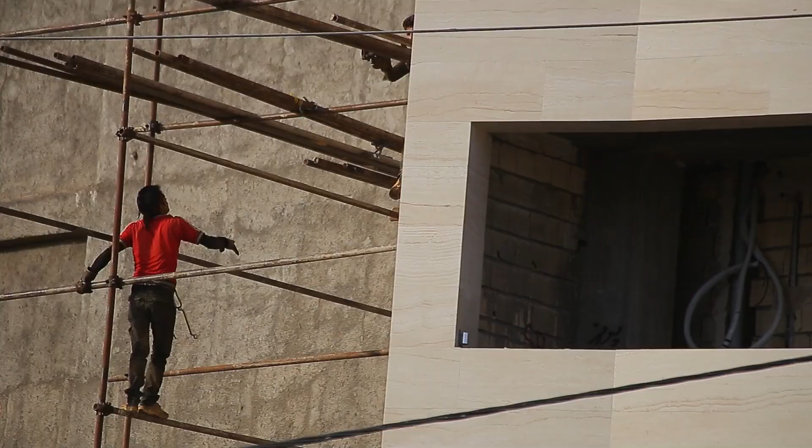Height. In this video, we are going to learn briefly about safety tips, safety in scaffolding, safety tips for ladder working, etc. Here are the contents we will cover in this lecture. The first one is safety tips for working at height, safety for ladder work, safety tips for scaffolding, working at height safety precautions, safety tips for lifelines, the safety dos and don'ts of working at height, and the last one is a conclusion.

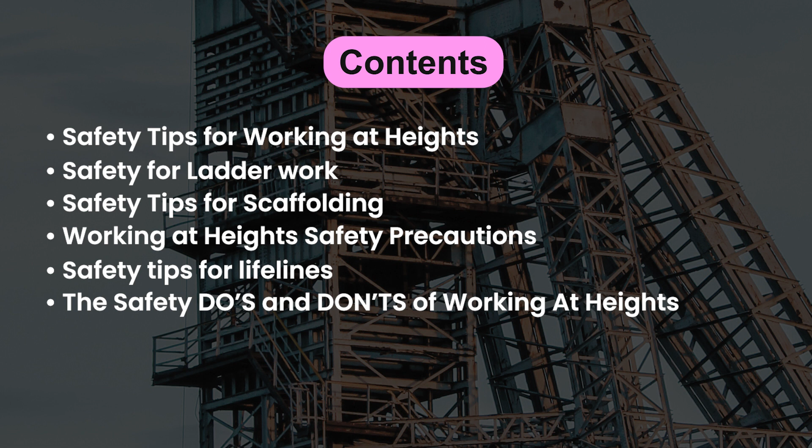Let us discuss the important points. The first important point is the safety tips for working at height. Working at height can be dangerous, but with proper safety precautions, you can minimize the risk. Here are some important safety tips for working at height. The first one is use the right equipment. Always use appropriate personal protective equipment such as hard hats, safety harness, non-slip footwear and gloves.

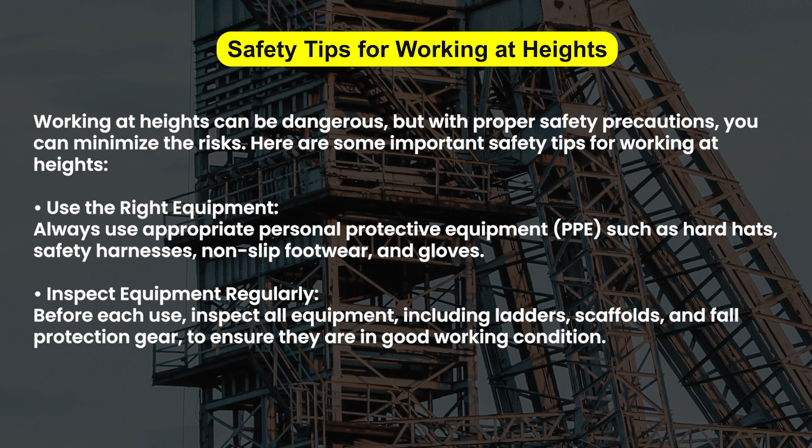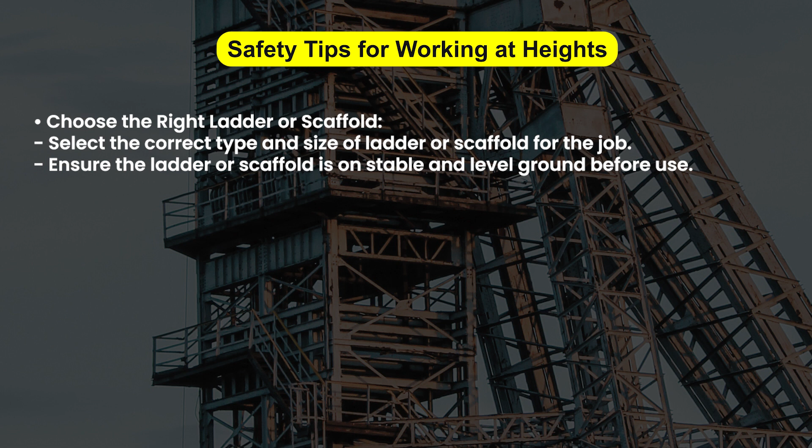The second point is inspect equipment regularly. Before each use, inspect all equipment including ladders, scaffolds and fall protection gear to ensure they are in good working condition. The next point is choose the right ladder or scaffolding. Select the correct type and size of ladder or scaffold for the job. Ensure the ladder or scaffold is on stable and level ground before use.

Another point is guardrails and toe boards. Install guardrails and toe boards on elevated platforms to prevent falls. The next important point is fall protection. Use fall protection systems like guardrails, safety nets or personal fall arrest systems, harness and lifeline when working at height above a certain threshold. The specific height requirement can vary by jurisdiction.

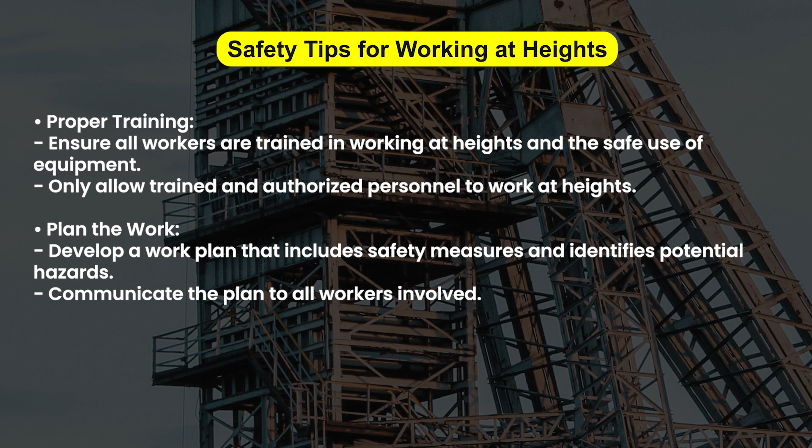Another point is proper training. Ensure all workers are trained in working at height and the safe use of equipment. Only allow trained and authorized personnel to work at height. The next point is plan the work. Develop a work plan that includes safety measures and identifies potential hazards. Communicate the plan to the workers involved.

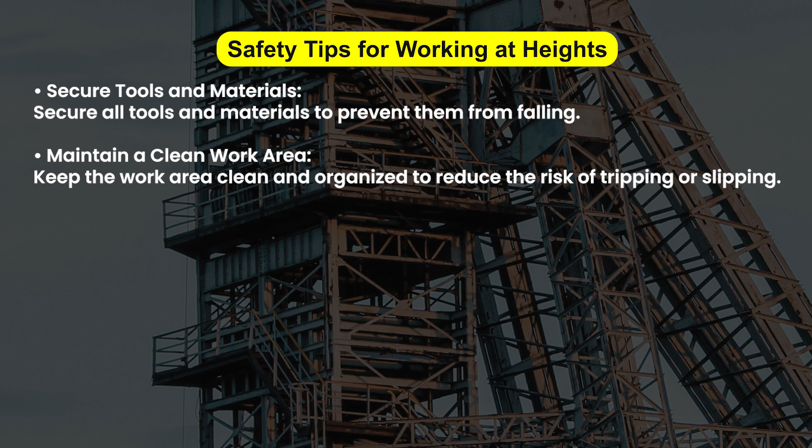Weather conditions. Be aware of weather conditions, as wind, rain or snow can increase the risk of accidents. Avoid working at height during adverse weather conditions. The next point is secure tools and materials. Secure all tools and materials to prevent them from falling. The next point is maintain a clean work area. Keep the work area clean and organized to reduce the risk of tripping or slipping.

The next point is keep a safe distance. Maintain a safe distance from the edge when working near unprotected edges or openings. The next point is no horseplay or distraction. Avoid horseplay, distraction or using electronic devices while working at height. The next point is a rescue plan. Have a rescue plan in place in case of a fall or equipment failure. All workers should know the plan and be trained in rescue procedures.

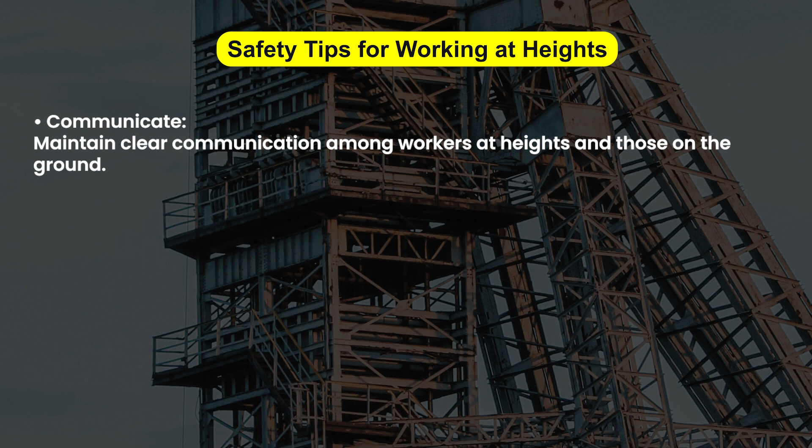The next point is communicate. Maintain clear communication among those working at height and those on the ground. The next point is emergency procedures. Know the locations of first aid kits and emergency exits. Have a plan in place for summoning help in case of emergency. The next important point is regular training and updates. Keep workers updated on the latest safety procedures and conduct regular safety training sessions.

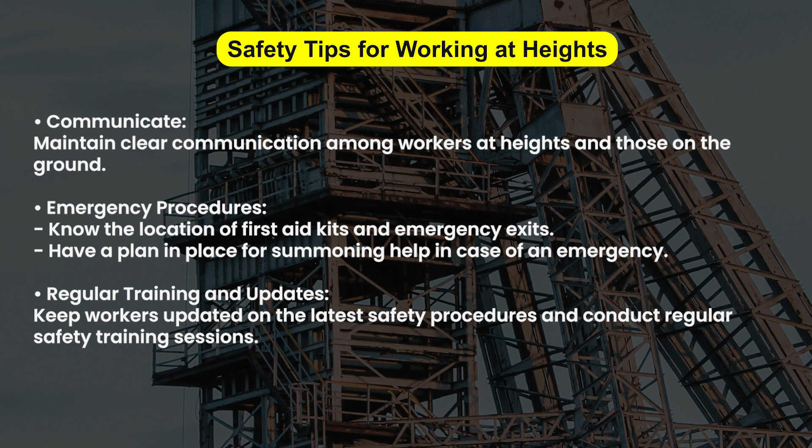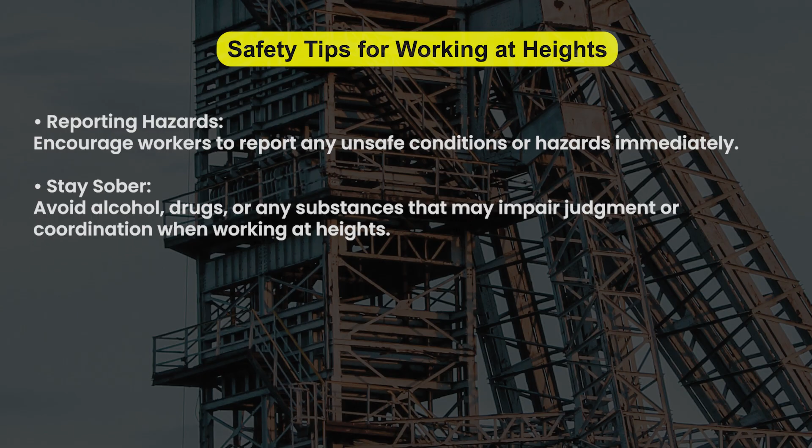The next important point is reporting hazards. Encourage workers to report any unsafe condition or hazard at their sites. The next important point is stay sober. Avoid alcohol, drugs and any substance that may impair judgment or coordination when working at height. Remember that safety should always be a top priority when working at height. By following these safety tips and being vigilant, you can reduce the risk of accidents and injuries. Always adhere to local safety regulations and guidelines, as they may vary depending on the location and industry.

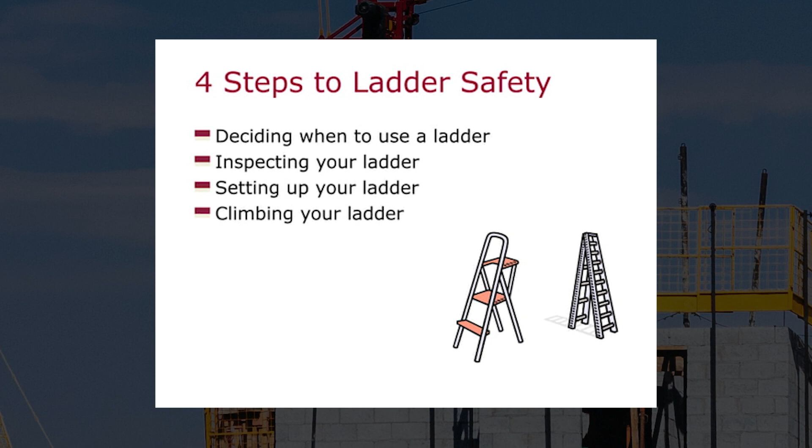Let us discuss the 4 steps to ladder safety: deciding when to use a ladder, inspecting your ladder, setting up your ladder, and the last is climbing your ladder. Let us discuss briefly the first point, deciding when to use a ladder. Use a ladder when you cannot safely reach an object or product in overhead locations. Whenever possible, try to arrange heavier items on lower shelves and lighter weight items on the upper shelves. Organize more popular products on lower shelves for quick accessibility. Store slower moving items on higher levels where a ladder would be required. Organize your storage room to limit and reduce ladder use.

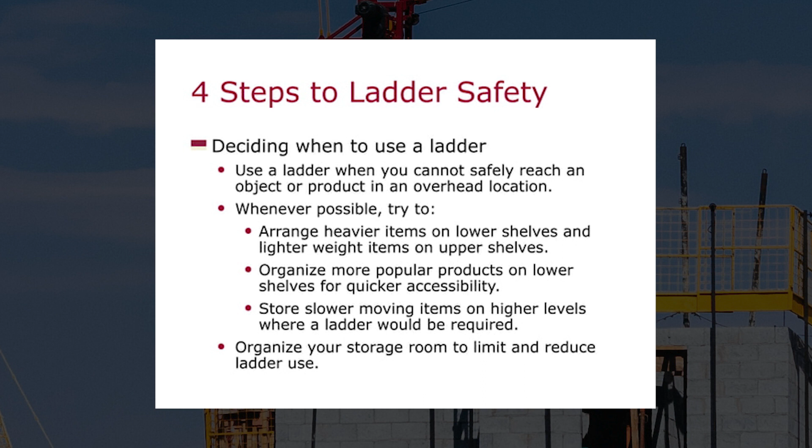Another important point is inspecting your ladder. Select the right size ladder for the job. Ensure your ladder is appropriate for the job and will support you and your load. Before use, check the condition of your ladder. Do not use a ladder with loose, broken or missing rungs, screws or bolts. If your ladder is unsafe, report it to your manager. Make sure the feet are clean, rest securely on the ground and resist slipping. Store your ladder safely to avoid tipping. Don't use your ladder for other than its intended purpose.

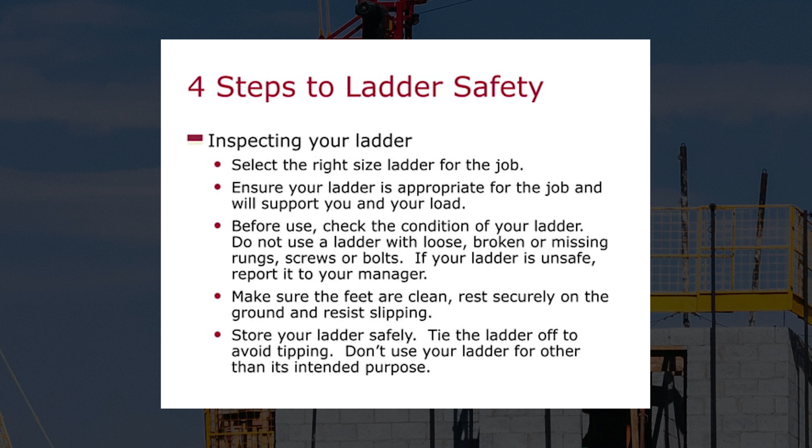Let us discuss another important point: setting up your ladder. When carrying a ladder, hold it near the center and keep it close to your body, or use 2 people to move the ladder, 1 person at each end.

Rest the base of the ladder on a dry, solid, even surface free from debris. If possible, have someone hold the ladder to provide added security. Secure your surroundings. If your ladder is set up near a doorway or high traffic area, use barricades or warning signs. Always place the ladder at the right angle to the work.

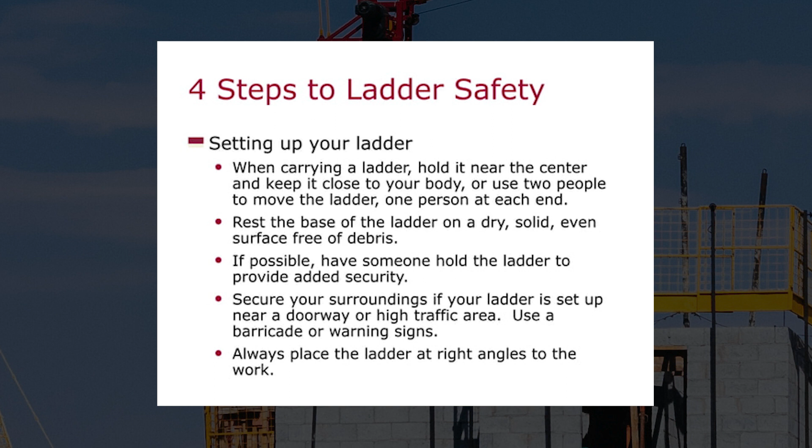Let us discuss another point: climbing your ladder. Use proper clean non-slip shoes on the ladder. Never climb a ladder with high-heeled shoes. Always face the ladder when going up or down. Keep your body centered between the sides of the ladder. Make sure only one person at a time is on the ladder.

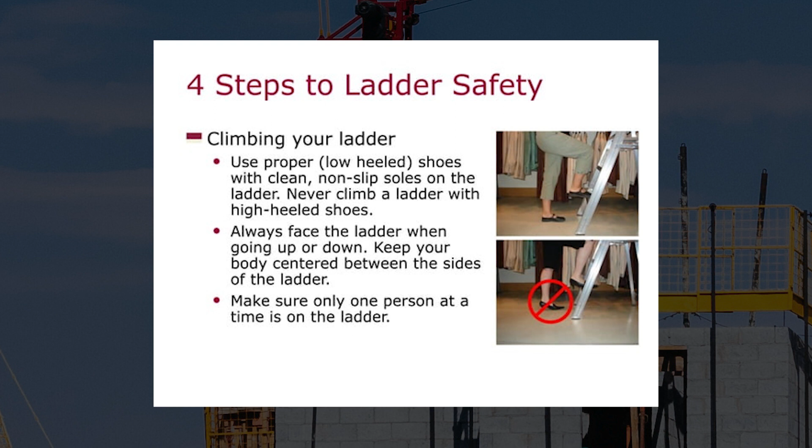Use the 3-point contact method. Ensure that both feet and one hand, or 2 hands and 1 foot, are in contact with the ladder at all times. Always face the ladder when going up or down. Keep your body centered between the sides of the ladder. If you cannot safely reach or carry a product on the ladder, call for help.

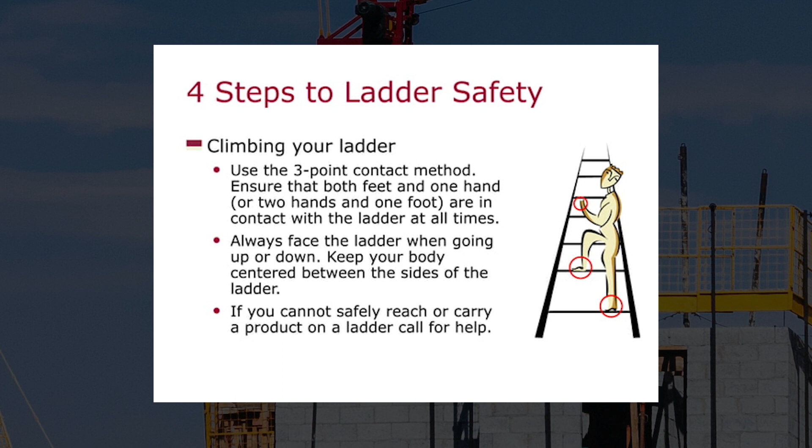Ensure the top rungs of the ladder are between your waist and head. For example, if you are resting against the ladder, never climb on the last few rungs of a ladder. Position the ladder within arm's reach of the product you are seeking; move the ladder if necessary, never overreach. When reaching for an item, ensure you reach directly in front of you, not to the sides.

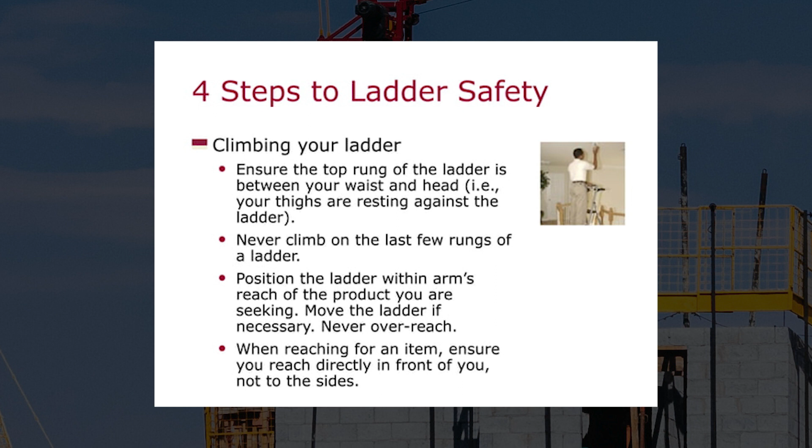Don't use the ladder in a horizontal position as a scaffold, plank or runway. Never leave a ladder set up and unattended. Always put your ladder away when your job is completed. Never use a step ladder as a straight ladder by leaning it against a wall. Do not walk or shift the ladder while on it.

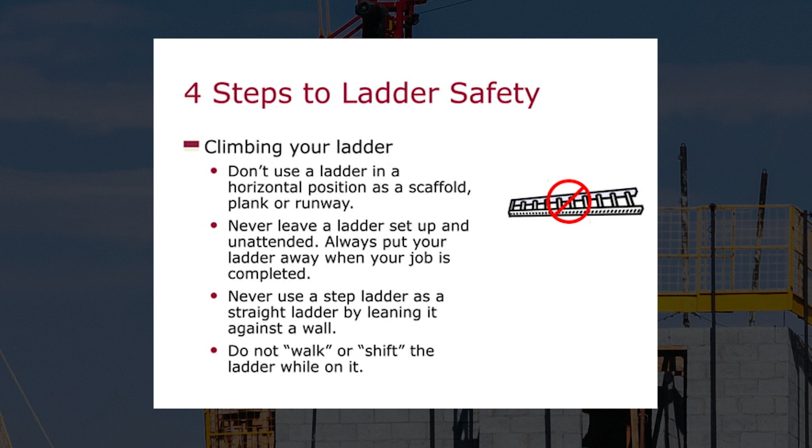Let us discuss the final thought. Never take a shortcut in ladder safety. After a fall, it is a long road back to recovery. Falls are not a laughing matter. As the old joke goes, the worst part of the fall is the sudden stop at the bottom. Be careful.

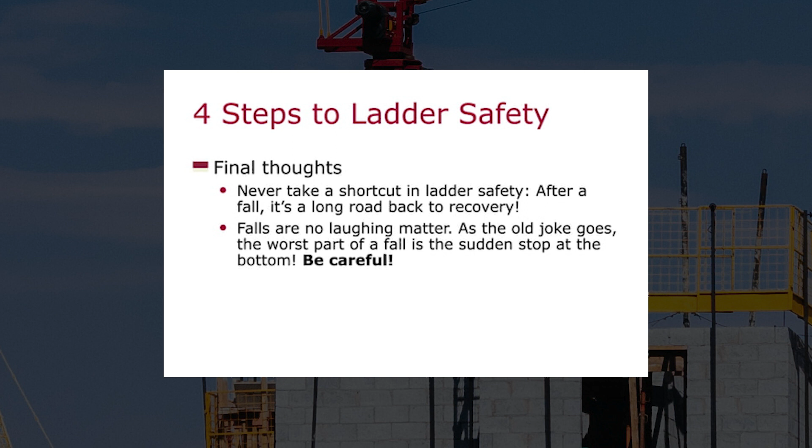Let us discuss another important point, that employees do the darndest things. Aren't you glad you work in tourism and not construction?

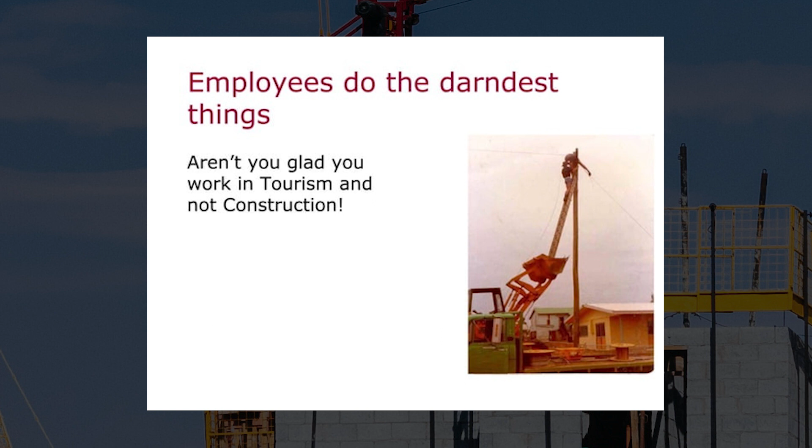Here is the next topic, safety tips for scaffolding. Working on scaffolding can be hazardous if not done safely. It is crucial to follow proper safety procedures to prevent accidents and injuries. Here are some safety tips for working on scaffolding. The first one is training and competency. Ensure that all workers using or working on scaffolding are properly trained, competent and familiar with safety procedures.

Second is qualified personnel. Have a qualified person inspect and approve the scaffold before use and at regular intervals during use. The third point is a secure foundation. Set up the scaffolding on stable and level ground. Use base plates, mud sills or adjustable screw jacks to provide a secure foundation.

The next point is proper assembly. Erect scaffolding following the manufacturer's instructions and design specifications. Never modify scaffolding components unless approved by a qualified engineer. The next important point is guardrails and toe boards. Install guardrails, midrails and toe boards on all the open sides and ends of the scaffold to prevent falls. Ensure they meet the required height and strength standards.

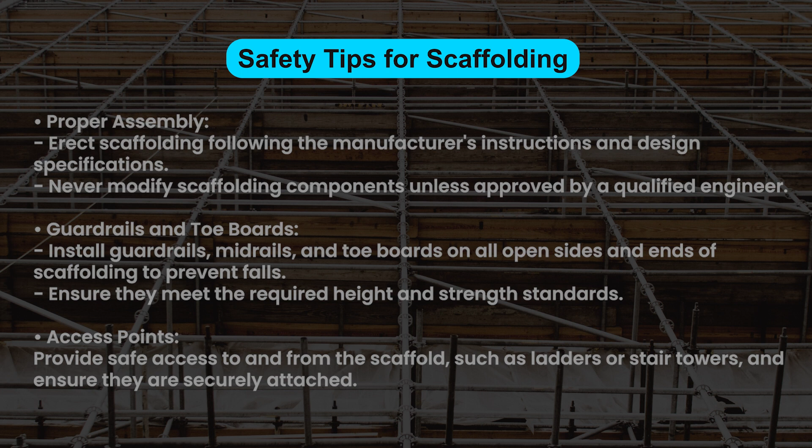The next point is access points. Provide safe access to and from the scaffolds, such as ladders or stair towers, and ensure they are securely attached. The next important point is fall protection. Use fall protection equipment including safety harnesses and lifelines when working on scaffolds at heights above a certain threshold, following applicable regulations regarding fall protection.

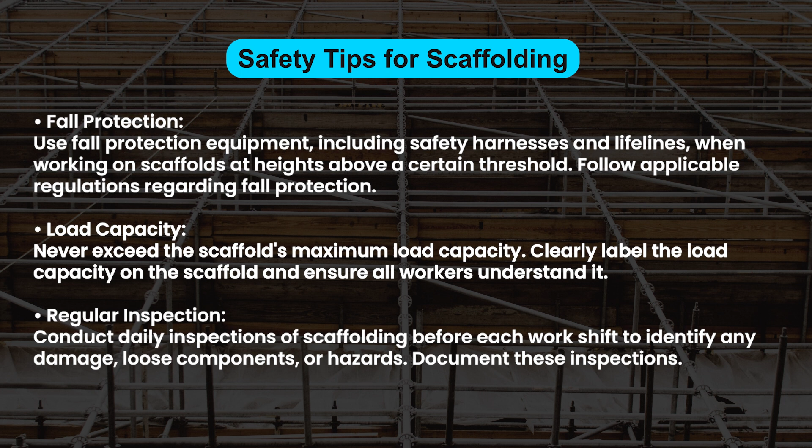The next important point is load capacity. Never exceed the scaffold's maximum load capacity. Clearly label the load capacity on the scaffold and ensure all workers understand it. The next point is regular inspection. Conduct daily inspections of scaffolding before each work shift to identify any damage, loose components or hazards. Document these inspections.

Planking and platforms. Use sturdy, undamaged scaffolding planks and platforms that are free from defects. Ensure they are properly secured to the scaffold frames. The next is fall arrest systems. If using personal fall arrest systems, make sure they are properly anchored to a structurally sound point and used correctly.

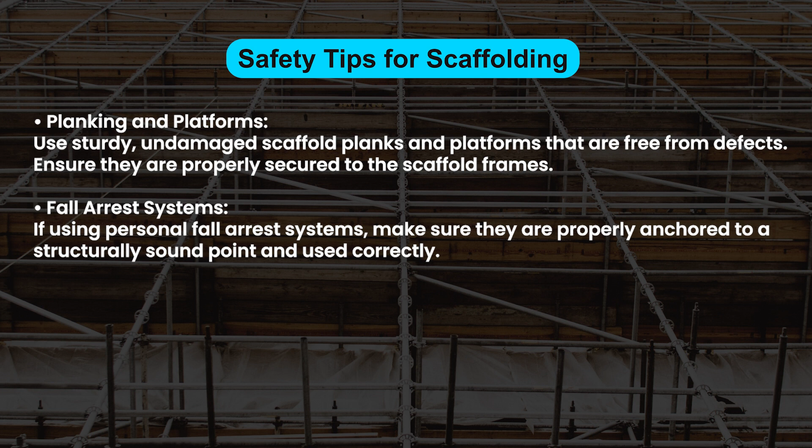The next important point is safe work practices. Keep the scaffolds clear of tools and material when not in use. Do not overcrowd the scaffold with workers or material. Never climb on the cross braces or stand on the top rail of the scaffolds.

The next important point is weather conditions. Pay attention to weather conditions. High winds, rain and ice can make scaffolds more hazardous. So, work should be postponed during adverse weather. The next important point is electrical hazards. Keep scaffolds at least 10 feet away from power lines to avoid electrical hazards.

The next point is communications. Maintain clear communication among workers on the scaffolds, those on the ground and supervision. The next point is training refreshers. Provide periodic refresher training on scaffolding safety to all workers to reinforce best practices.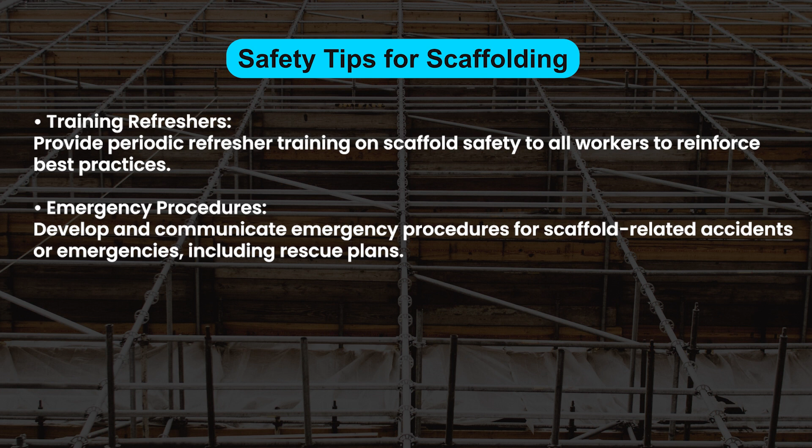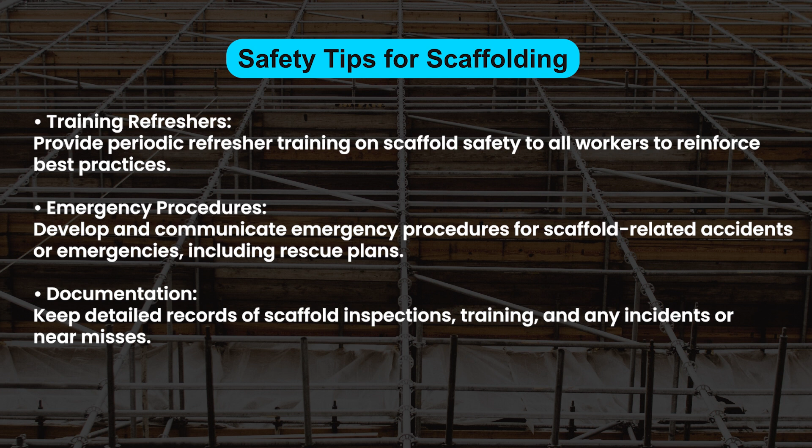Next important point is emergency procedures. Develop and communicate emergency procedures for scaffold-related accidents or emergencies, including rescue plans. Documentation. Keep detailed records of scaffolding inspections, training and any incidents or near misses as documented records.

Remember that scaffolding safety is a shared responsibility. Workers, supervisors and employers must all play their part in ensuring that scaffolding is used safely and that everyone goes home unharmed at the end of the workday. Compliance with safety regulations and standards is crucial to maintaining a safe work environment on scaffolding.

Let us discuss another important point, working at height safety precautions. Below are 6 important fall and safety precautions. It is not an exhaustive list, but many workplaces can benefit from these best practices. Guidelines for working at height. You will notice that this list includes different levels of the hierarchy of hazard controls.

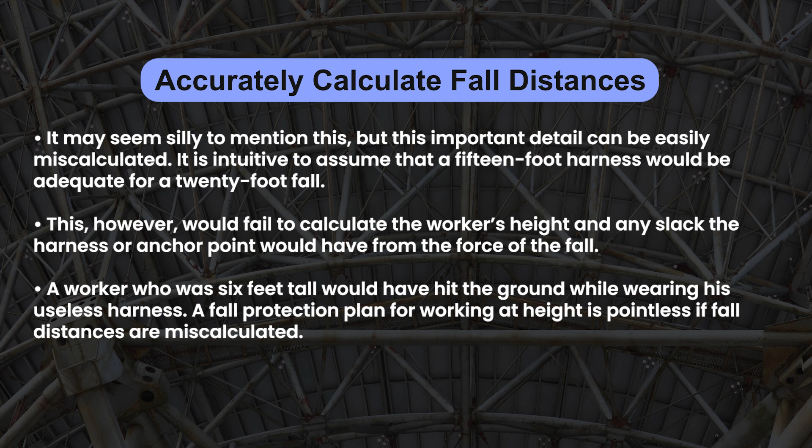Let us discuss another main point: safety tips for lifelines. Minimum breaking strength 2000 kg, protected from abrasive and cutting edges. Workmen should not hold it for balance. The lifeline should be a minimum of 12 mm dia wire rope.

Not more than 2 persons shall be permitted to attach their lanyards to a single horizontal lifeline at one time. The lifeline shall be anchored between 2 post supports not more than 6 meters apart. No more than 1 person may tie off to a vertical lifeline.

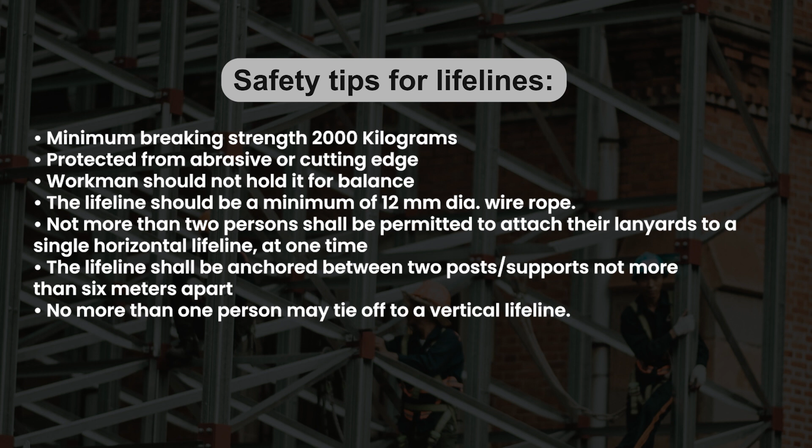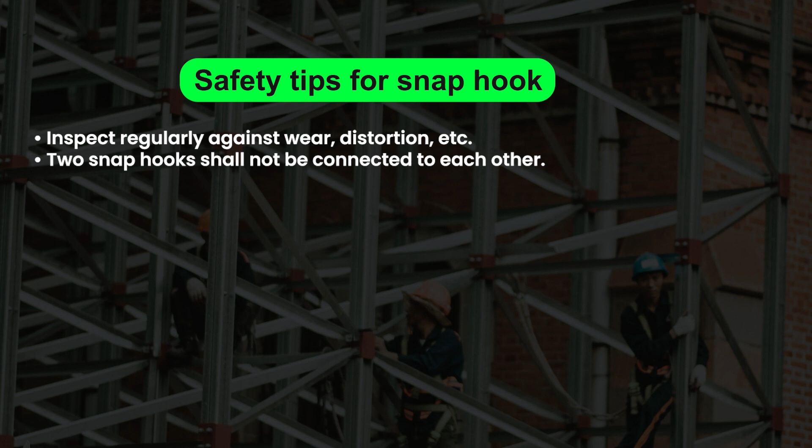The next point is a safety tip for snap hooks. Inspect regularly against wear, distortion etc. Two snap hooks shall not be connected to each other. The next point is a safety tip for body harness. Inspect regularly against abrasions, broken stitching, missing hardware. Instruct the worker about the use and care of the same.

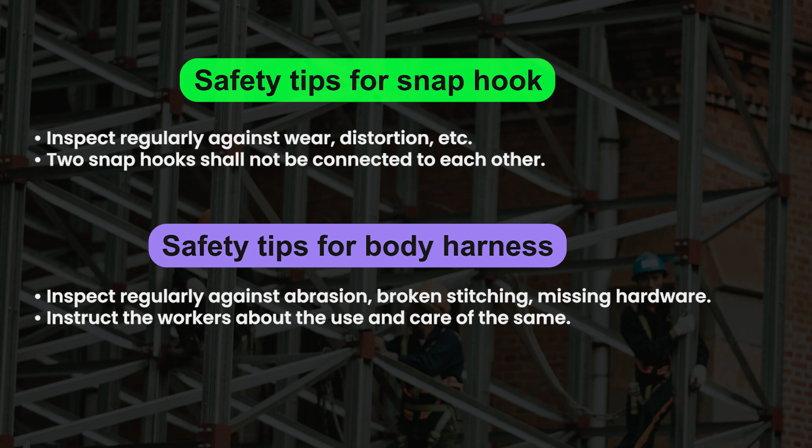Let us discuss another main point: working at height examples. Installation and painting of overhead cranes, monorails, conveyors, piping, insulation of overhead piping, erection and painting of tank chimneys, construction of exterior brickwork and finishing and cladding work, erection and dismantling of scaffold, working on a pile driving rig, working on a fragile roof, working on a ladder and working on a trestle.

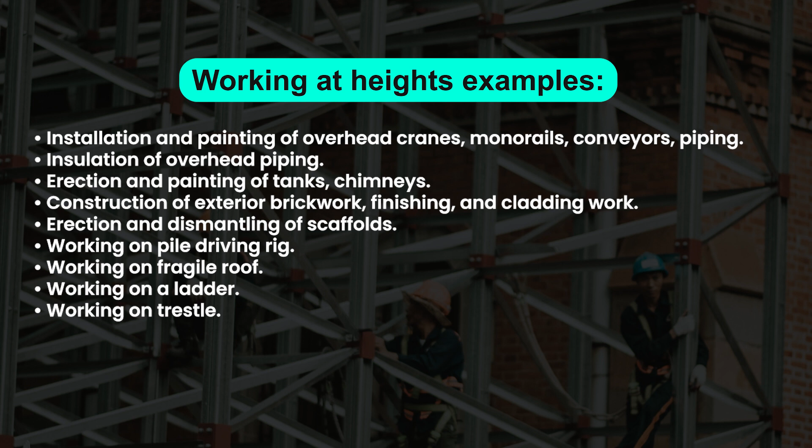Let us discuss another main point: the safety do's and don'ts for working at height. Working at height do points. Do as much work as you can while you are on the ground. Do make sure that employees can get safely to and from the area where they are working at height. Do ensure that the equipment you are using on the job is strong, stable and suitable enough to get the job done. Inspect and maintain it regularly.

Do be careful when you are working near a fragile surface. Do ensure that you are protected from falling objects. Do make preparation for emergency evacuation and rescues.

Let us discuss the don't points. Don't overload the ladder that you are working on with equipment or materials. Don't try to reach too far when on the ladder or step ladder. Don't use a ladder or step ladder to do heavy and extensive tasks. Only use them to do work that is quick and light.

Don't allow incompetent workers to work at height. Don't lean or place the ladder on a fragile surface. Don't stay quiet when you feel someone is compromising their own safety or the safety of others.

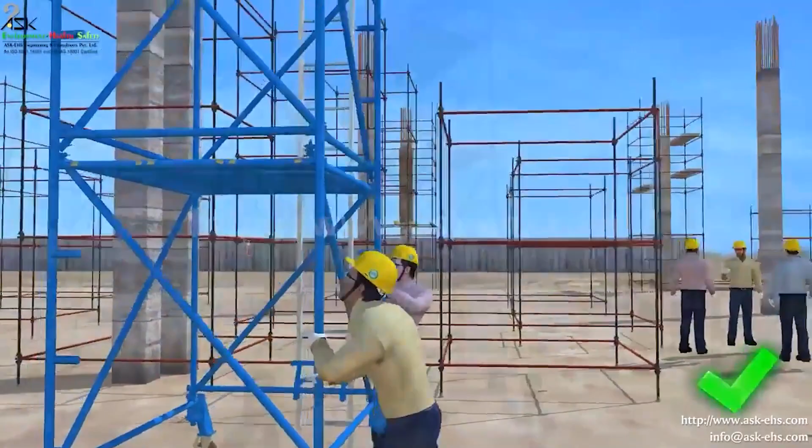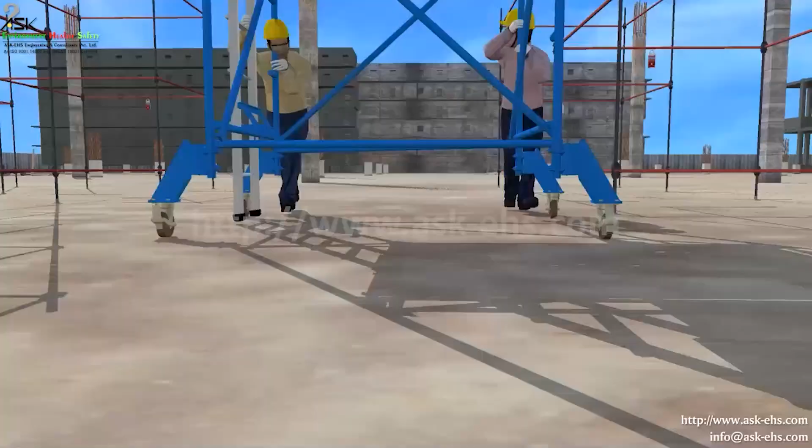Mobile scaffold shall only be used and moved on surfaces sufficiently firm and level to ensure stability. Use the ladder or steps provided in the scaffold to climb up or down. Do not step on cross bracings. Do not overload the mobile scaffold. Move the mobile scaffold only by manually pushing or pulling at the base.

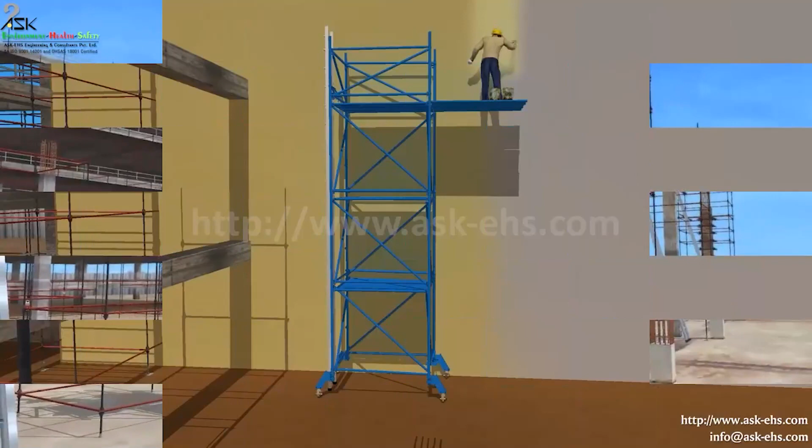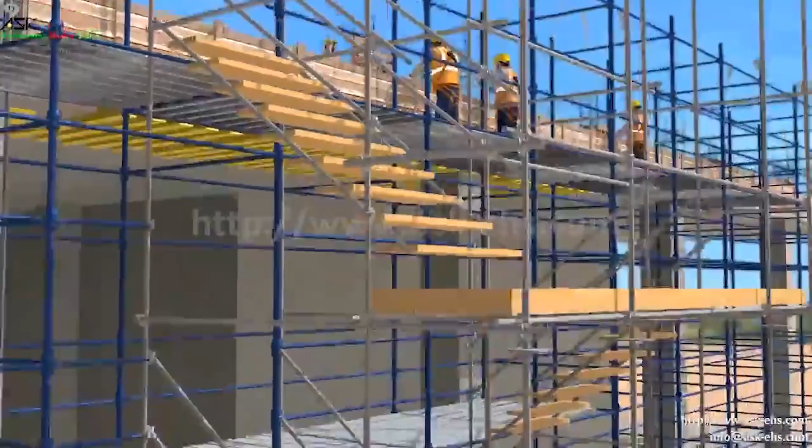Remember to lock the wheels when towers are in use. No person or material is permitted to remain on a mobile scaffold while it's being moved. Do not extend from the working platform as it may tilt the scaffold. Always use the proper access and egress provided in the scaffold. Do not sit or lean on the scaffold hand railings.

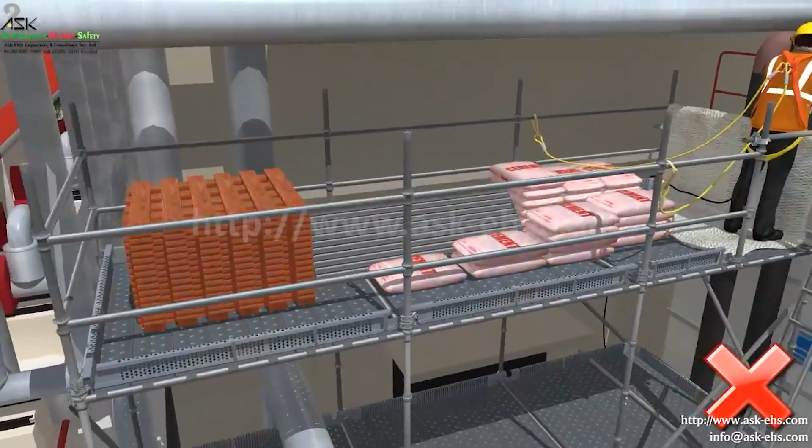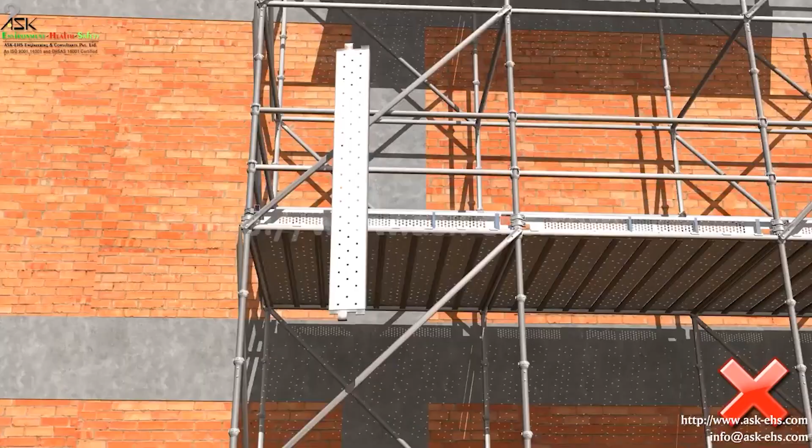Do not overload the scaffold platforms. Use the double lanyard safety harness and the fall arrestor while climbing up or down the scaffold. Never throw anything from the scaffold. It may injure the person standing below. Do not leave any gap while placing the walkway platform boards.